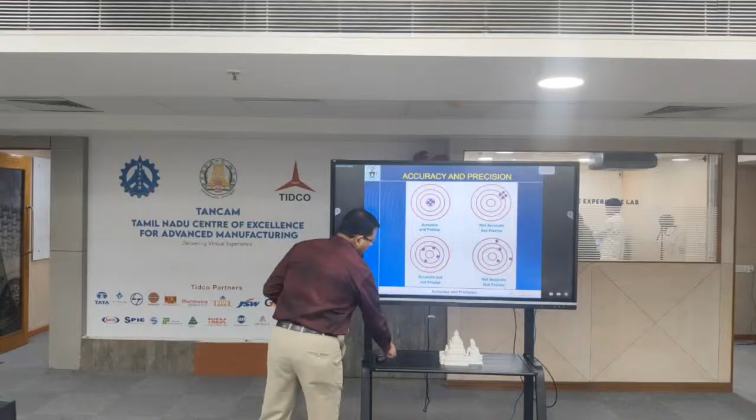You are doing so many drawings, maybe models. In the manufacturing industry, if you want to manufacture any component, we cannot manufacture it to the exact size. So we give tolerance on each part. Why are we giving tolerance? Because we are not able to manufacture the component to the exact size.

Because of so many things. Even if I say, for example, the height of this bottle is maybe 15 centimeters, how can you ensure this? I can say the height of this bottle is 15 centimeters. How can you ensure this? How can you test this?

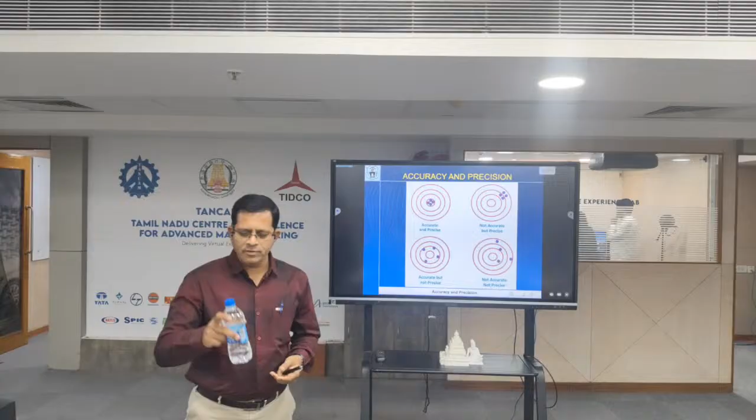Using measuring tools, you can use something, maybe a scale or tape. Because of this irregular shape, we have to measure indirectly, like measuring our height. We can mark on the wall, stand, and measure the height. Similarly, we can measure the height of this bottle also. But is it correct?

It may not be accurate. So while marking itself, we are doing some mistakes, or maybe there is error in whatever tape you are using, or there may be parallax error while taking the reading. There are so many reasons in measuring systems, measurement units, or measuring instruments. That's why normally we cannot manufacture any component to the exact size and shape. 100% accuracy is not possible.

So first we need to understand accuracy and precision in manufacturing. Of course we use this word very frequently, but both are not the same. So what is accuracy? This is accurate, but it is also precise.

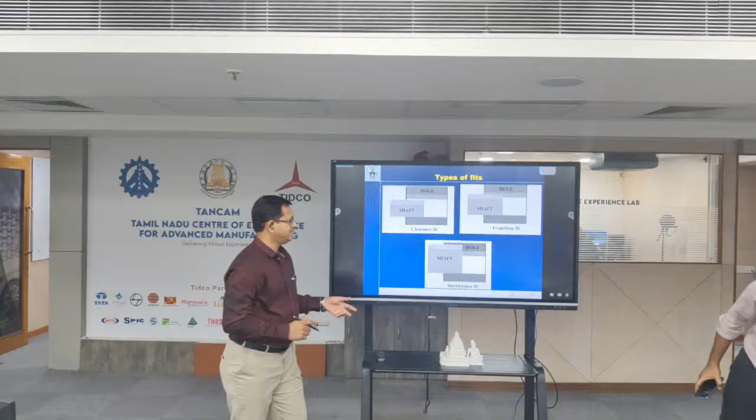Or I'll start here. So this is not accurate, not precise. As per this one, we want the target here, but the target is hitting at different places. So what is accuracy? If you are able to reach the goal with less error, then we can say it's accurate.

Then what is precision? Whatever number of times you are repeating, if you reach the same accuracy, then we can say it's precise. If you see, all four are different distances from the center, so these are not accurate because it is not inside the circle, and also all four are not at the same distance or same point.

So this is not accurate, not precise. But if you see this one, this is accurate because all four are at the same distance from the center, but it is not precise. Why? Because every time it is changing its place.

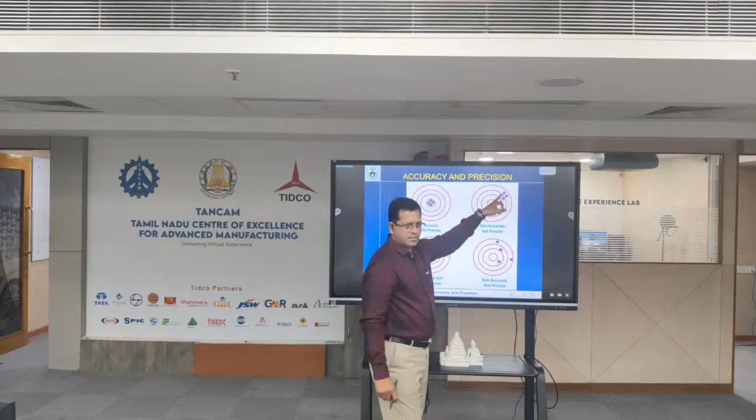Okay, and if you see this, it is precise, so whatever 4 times or 10 times you are doing, you are getting the target at the same point, but it is not accurate. And this one indicates both accuracy and precision.

For example, we are preparing for something, maybe a running race, or you are writing a test, maybe some JEE or some entrance test. There are two things: getting the maximum score is important, and at the same time, every time getting the maximum score is also important.

Suppose you are doing BTech or MTech. If you are scoring 90 marks in one subject and 40 marks in another, there is no use. If you are getting 90 marks in all subjects, this is very good, or at least all subjects around 70%, that is also good. But if you get 45 in one subject and 90 in another, you are not good in all subjects. That is what we understand.

So similarly here, we see accuracy and precision. In manufacturing, we want both accuracy and precision. That means suppose one time you are able to reach the goal within time, but the next time you are not reaching it within time, then there is no use.

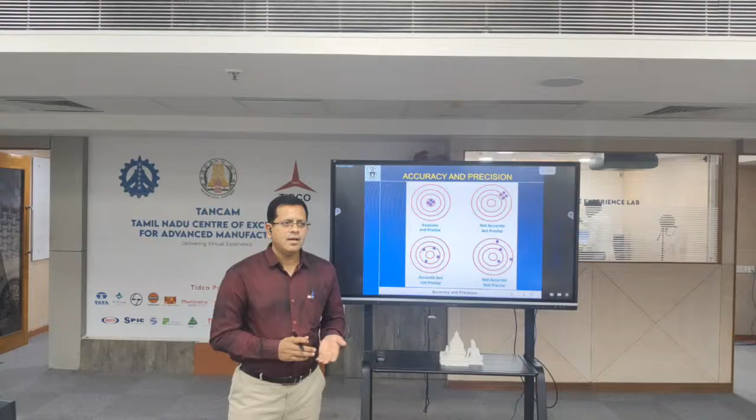So if you developed software or a machine, anything, every time over repetitive attempts you are able to achieve the minimum cost or maximum production or high quality product, then only we can say it is precise. So both accuracy and precision are important in manufacturing. Even if you are accurate, it is not sufficient, or if you are precise, it is not sufficient. Many times we use these two words simultaneously, but it should be very clear.

Right. So now we are coming to this. I think all of you know the tolerances. That's what we are discussing. So if you want to manufacture any component, normally we define a tolerance. That is, for example, if I want to manufacture a

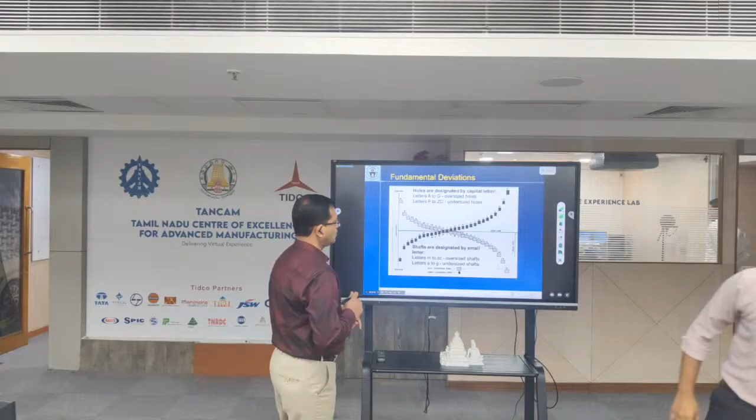So if you want to manufacture one shaft, right? So normally what we can do, we define the diameter is equal to maybe 20 mm, plus or minus. So we take the dimension as 20 plus or minus 0.1 mm, right? That means actually the basic size required is 20 mm, but we cannot manufacture exactly to the 20 mm. So we have to give some tolerance, right?

This is what we see in our daily life also. Your office is at 9:30, but are we exactly coming at 9:30? Some people may come 9:20 or 9:25, or some people may come 9:35. Even if everyone comes at 9:30, you cannot enter the door, right? That means we have to give tolerance on both the sides. Sometimes it is not possible. So, if you are giving tolerance on only one side, we can call it unilateral tolerance. Or if you are giving tolerance on both the sides, then we can call it bilateral tolerance. I think these are the basic things all of you know, right?

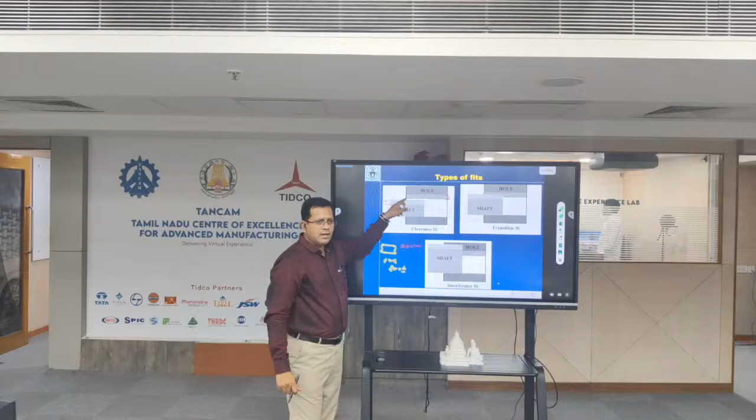So if you see, the lower limit of the hole is always greater than the higher limit of the shaft. That means if you manufacture a shaft, whatever the value, you are going to get a clearance. And similarly, if you see here, even the lower limit of the shaft is bigger than the higher limit of the hole. So always you are going to get interference. So in these two cases, no issue, right? Because this limit is always bigger than this limit, and here this limit is bigger than this limit.

But if you see this one, the transition fit, for example, if the actual dimension of the shaft is here and the actual dimension of the hole is here, then you are going to get clearance, right? But for example, if the actual dimension of the shaft is here and the actual dimension of the hole is here, then you are going to get an interference. That is why we call it transition fit. Okay. So in manufacturing, it depends on the functionality, the dimensions, or maybe our constraints.

Suppose you are given the limits like this in the transition fit. So you are manufacturing two components like this in the transition fit. Even though I am manufacturing like this, I want always a clearance. You got my point? Here, there is a possibility of clearance or interference. I am following these limits. But still, after manufacturing a lot of shafts and a lot of holes, in the assembly I want to always maintain a clearance. How can I get it?

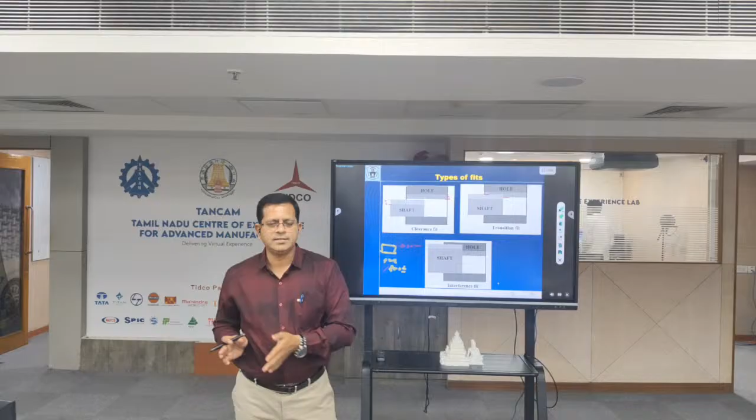Bilateral tolerance? Pardon? Unilateral tolerances. Using unilateral tolerance, I'm giving the dimensions like this only, right? But I'm not manufacturing a single shaft and a single hole. No one will. We are manufacturing shafts continuously and holes continuously. But while doing assembly, I want clearance. How can you get it? Machining? No, I am not going to do anything. I use only this.

Depending upon the assembly, we can choose the types of fit. Clearance fit for one type of assembly, transition fit for another type of assembly. For example, the pen and cap here. First, it's a hole basis method. Yes, this is called transition. Yeah, that is my question.

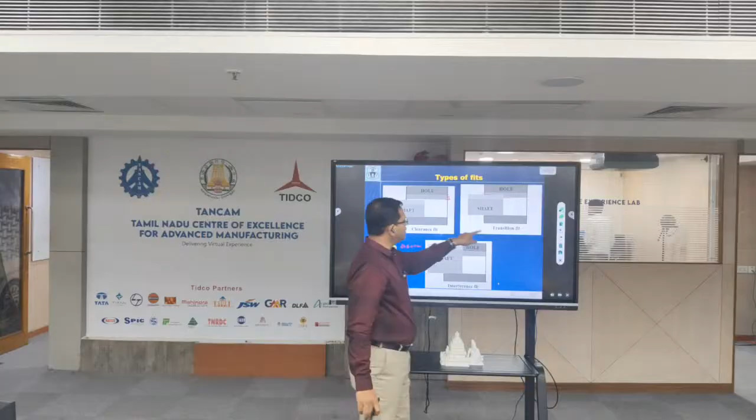Actually, we are following this system based on the component manufacturing, maybe material constraint or dimensional constraint or whatever. But we are manufacturing the shafts and holes individually. While assembling, it depends on the functionality. Sometimes I want clearance in one product, but in another product I want interference. How can I achieve that?

This is so simple. I'll give you a small example. For example, you have 100 people from one college and another 100 people from another college. All 100 people are cricket players, okay? But among them, a few are batsmen, a few are bowlers, a few are all-rounders or fielders. There will be a combination, right? The other side is also the same, okay?

So if I want a team which is very strong on the batting side, depending on the ground and the opposing team, we can change the mix of players, right? Sometimes we use a fifth bowler, sometimes a fifth batsman. Why? Because we know, depending on the ground condition, it may be a batting pitch, so we can use an extra batsman. Or on a bowling pitch, an extra bowler. Sometimes fast bowlers, sometimes slow bowlers.

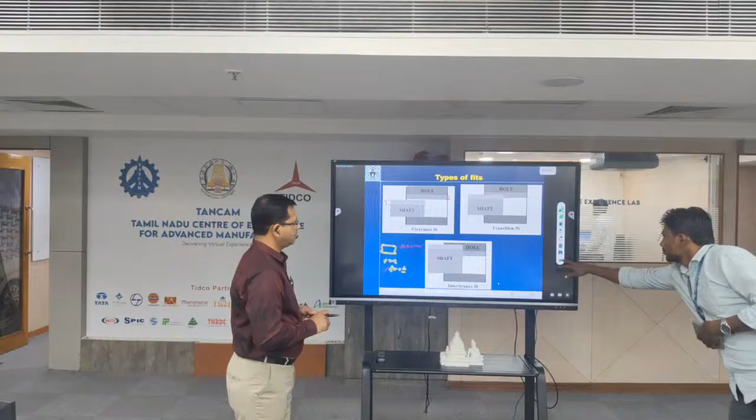So similarly, we use selective assembly. For example, you are manufacturing 100 shafts and 100 holes, and I want to mix these two to get 100 assemblies. Among these 100 shafts, take a shaft like this, and the tolerance zone is this one. We don't know how many are at the lower limit, how many are at the higher limit, and how many are at the exact dimension. Similarly for the hole also.

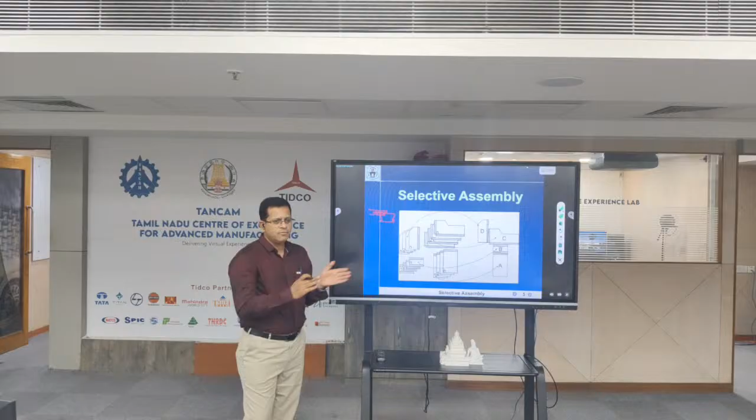Now I divide these 100 holes into 5 groups and the 100 shafts into 5 groups. Groups means nothing but dividing the same tolerance zone into 5 parts. Assume the total tolerance zone is like this. I divide it into 5 parts, and after measuring with a go gauge or no-go gauge, whatever components fall in this region become group 1, then group 2, group 3, group 4 and group 5. These are the shafts. Similarly, holes also I make into 5 groups.

Now I cannot assemble randomly. Actually, all these 100 holes and 100 shafts are within the limits. All are accurate and qualified for assembly. But still I am not randomly assembling. I make the holes into 5 groups, then take the shafts in group 1 and the holes in group 1, and assemble only group 1 to group 1.

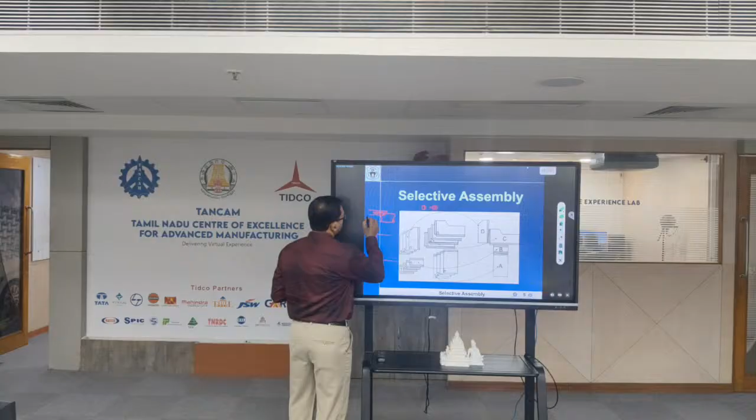Are you understanding? So for example, here you take the lower limit as 20.0 mm, and the higher limit is maybe 21.0. Then this may become 20.02, 20.04, 20.06, 20.08 and 21, like that, or 20.2, 20.4, 20.6, 20.8, 21, right? And similarly the hole dimension is also the same.

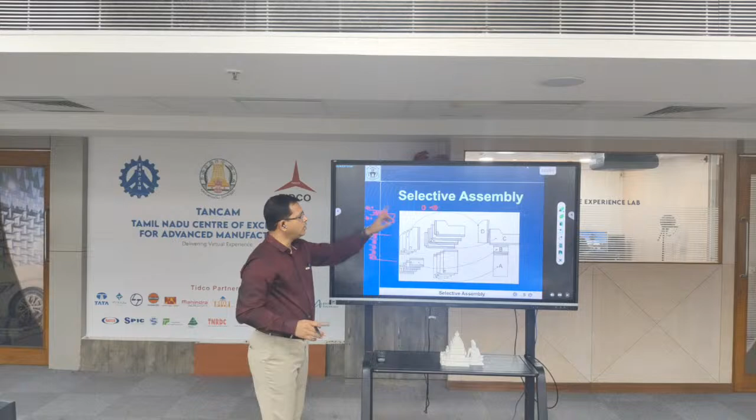So if I assemble the shafts in this group and the holes in that group with the same tolerance zone, we are able to get the assembly with very less clearance or less interference. So we are not changing the tolerance on the shaft or the tolerance on the hole. We are not increasing the cost, we are not changing the manufacturing process, we are not changing the material. The only thing is, before assembly, we are just making the groups, separating them, and assembling group 1 to 1. Okay.

So like this, this is one technique, grouping of the components based on their tolerance zones, so that we can increase the accuracy of the assembly or functionality of the component or product just by making groups in the tolerance zone. How many groups we make is up to you. It depends on the tolerance zone. Maybe you can make only 2 groups, or 3, 4 or 5 groups.

But one condition here is that the number of groups you make in the shafts and the number of groups you make in the holes should be the same. If this tolerance zone is divided into 4 or 5 parts, the same tolerance zone on the hole is also divided into 4 or 5 parts. So like that, without changing the manufacturing process, the material, or the assembly process, without changing anything, we are able to increase the accuracy just by making groups and assembling a particular group to a particular group.

So this is one of the concepts we can follow in precision manufacturing to improve the accuracy as well as the functionality of any product, right? Is it clear? Any doubts?

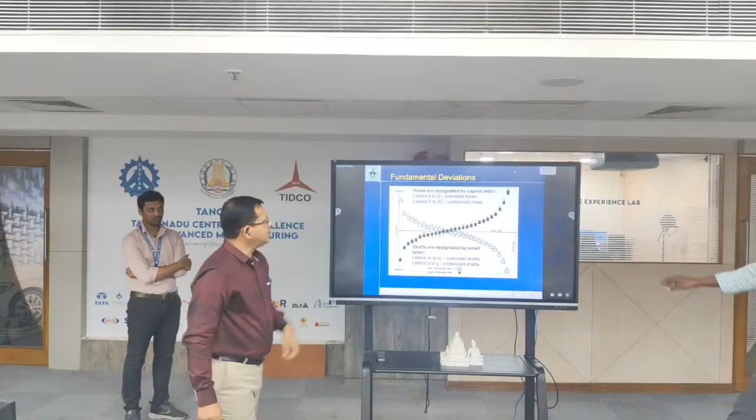Previous slide. Cancel. Previous slide. No, alright. So I think that's it.

I think all of you know this one. If you completed BTech, you should know, right? So these are the fundamental deviations we see on holes and shafts. Normally we use 18 grades of tolerances and 25 fundamental deviations, right? So this one is A to ZC. These are the fundamental deviations we indicate on the holes, and these are the fundamental deviations we indicate on the shafts. For example, we write like this, maybe 20.

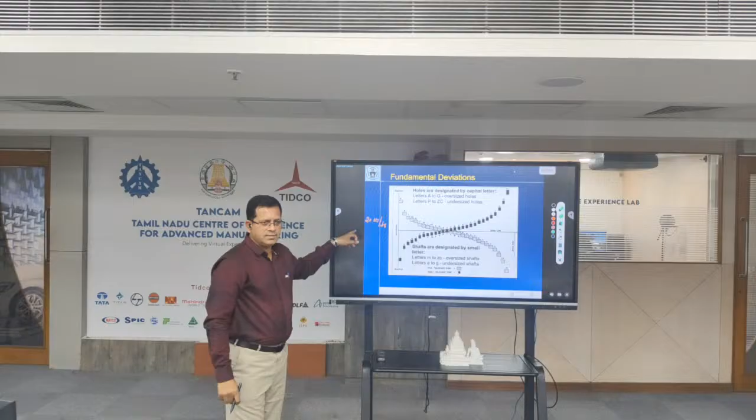So we can write 20 H7/f8. 20 indicates the basic size, and capital H indicates the fundamental deviation on the hole. H does not mean hole; any letter can be used, but a capital letter indicates the fundamental deviation on the hole, and a small letter indicates the fundamental deviation on the shaft. The number corresponding to the capital letter indicates the tolerance on the hole, and this one indicates the tolerance on the shaft, right? So H is 7.

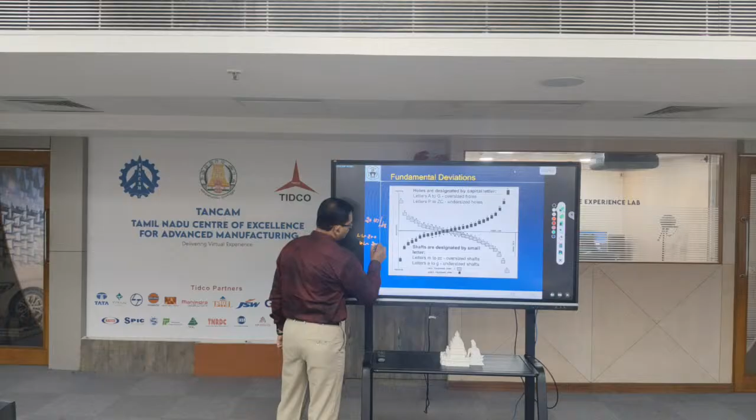So this is H, the fundamental deviation on the hole. And f is this one. The basic size is 20, and if you see here, the fundamental deviation coincides with the zero line. That means for this hole, the lower limit is 20.0, and the higher limit is 20.0 plus the tolerance corresponding to grade IT7. I think all of you know how to calculate the tolerance, right? So this is the lower limit and this is the higher limit for the hole.

Similarly for the shaft, the basic size is 20 and the tolerance is this one. So this becomes the higher limit of the shaft, and this becomes the lower limit of the shaft. The higher limit of the shaft is equal to the basic size 20 minus this gap, that is the fundamental deviation. And the lower limit is equal to that minus the tolerance. Okay.

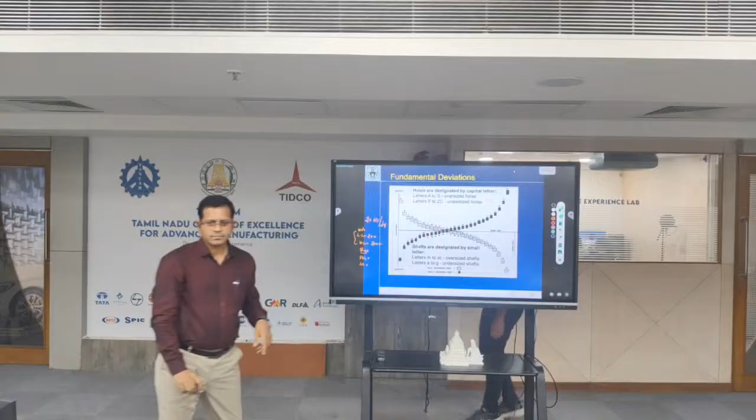So like this, normally in an assembly, if you know the basic size, the fundamental deviation and the tolerance, we calculate all the limits on the holes and the shafts, right? Okay. But here, one more thing is there.

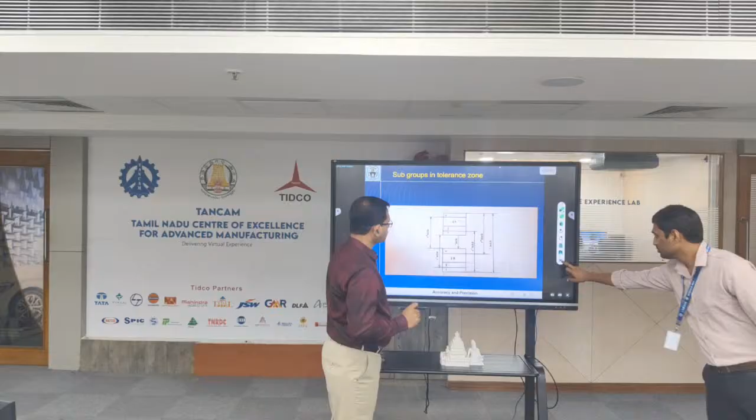So here one more thing is there. Again, in the transition fit, there is a possibility of either interference or clearance, right? For example, take this as the hole. The lower limit of the hole is this one, and the higher limit of the hole is this one. And the lower limit of the shaft is this one, and the higher limit of the shaft is this one. Now, if you take this size 40H7/m6, this is the diagram.

So this is 40.0, the lower limit of the hole, and this is 40 mm plus 25 micrometers. And this is the lower limit of the shaft, that is 40 plus 9 micrometers, and this is the higher limit. So after manufacturing, what is the actual size of the hole? We don't know. It may be here, or here, or here. And similarly, after manufacturing, the shaft will also be somewhere, right? We don't know.

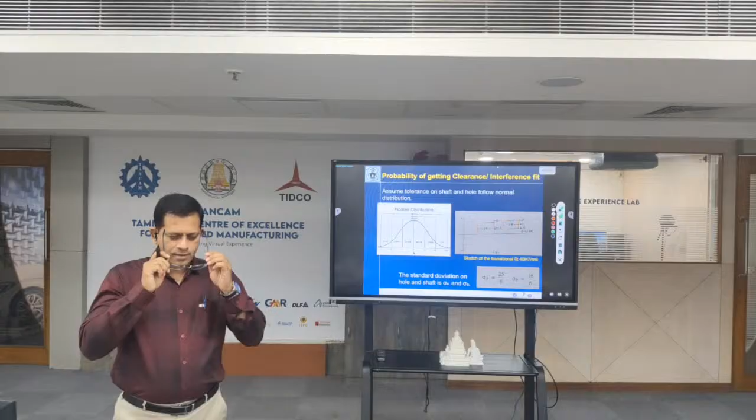So if you manufacture a hole and shaft like this, after assembly, what are you going to get, clearance or interference? How can you say? Making groups, forget about that one. Groups is another concept. To improve the accuracy, we can make groups, and within the group we make the assembly, depending on whatever clearance or interference you want.

Now we don't have groups. We manufactured only one hole and one shaft. Now I am assembling. So what is the probability of getting clearance or interference? How can you say? Because the definition of the transition fit is either clearance or interference. Then how can you say? 50-50? No?

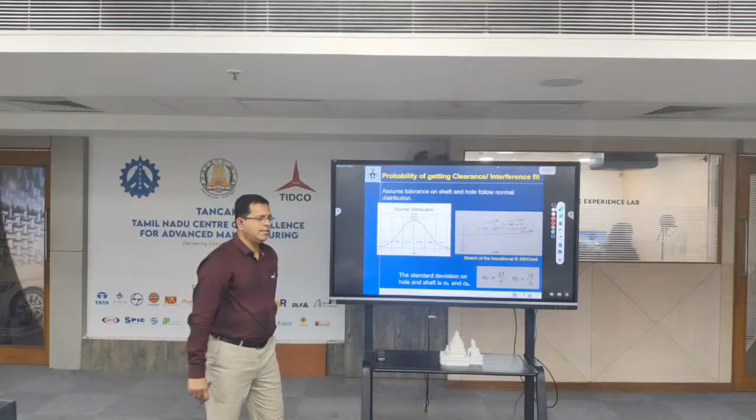So here we need to understand one more thing. Take this tolerance zone. This is the center line, the mean value, for this tolerance zone. And similarly, take the mean value of this tolerance zone. Now consider only mean values. The mean value of the hole is less than the mean value of the shaft, right? And manufacturing always follows the normal distribution curve.

That means if you manufacture 100 holes and 100 shafts, the actual sizes of the hole and shaft follow this normal distribution. If you find the standard deviation, some components are within this sigma range, others within this range, and very few components are within this range. So most of the components are near the mean value, at least 68.26%.

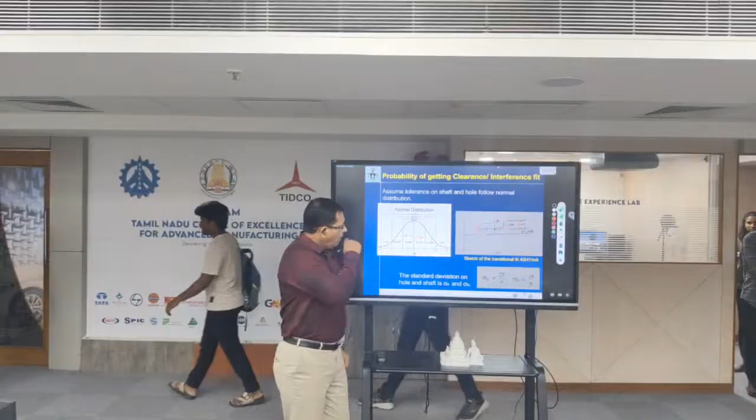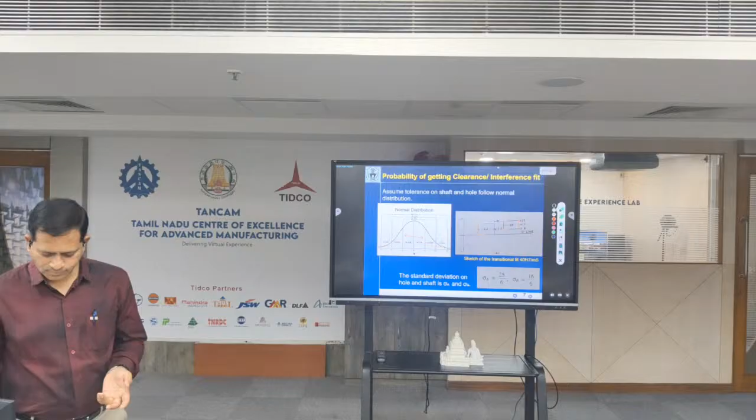So even though the basic size is 40.0, and we have lower and higher limits for both, you take the mean values and compare. From the mean values, we understand that the hole size is less than the shaft size. So the probability of getting interference is more, but how much more? Here the probability of getting interference is more than 50%.

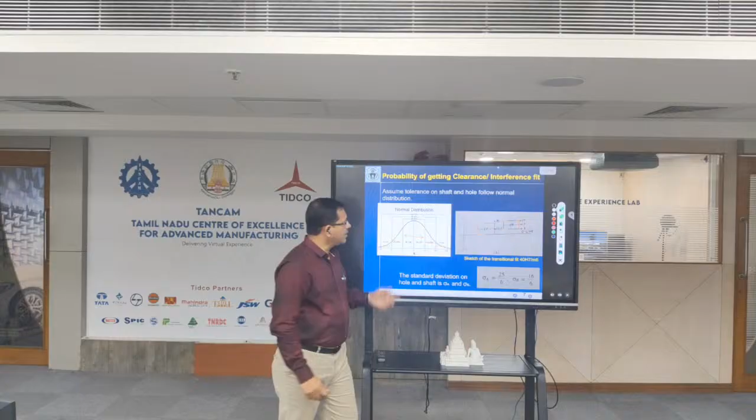For example, if the hole mean value is greater than the shaft mean value, then the probability of getting clearance is more than 50%. Is it clear? So from this we understand which one you get in most cases. And by calculating the standard deviation, 1 sigma, 2 sigma, 3 sigma, we can calculate this difference. This is 17 minus 12.5, that is 4.5. So calculate the equivalent standard deviation.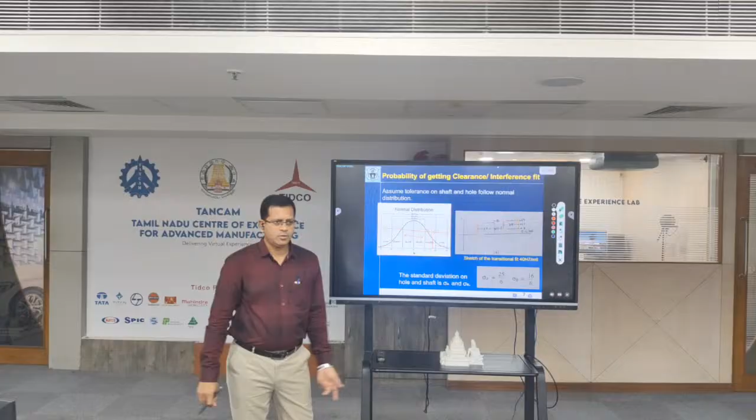Here interference is there, and it may come somewhere here based on the percentage of area covered under the 6 sigma limits. All this is interference and this is clearance. So the probability of getting interference here is around 74% or 77%, and clearance only 20% or 22%. I'm not going into the calculations, but like this we can find exactly the probability of getting clearance and interference.

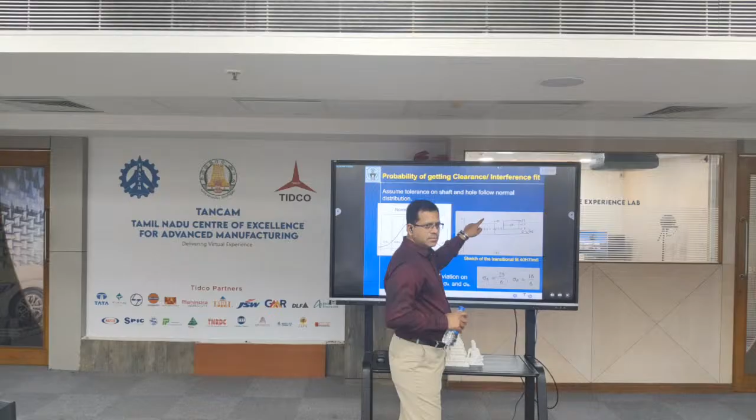I am not touching basic things like tolerance and fundamental deviation, because all of you know these. These are two important points we normally don't study at the BTech level: without changing the tolerance, manufacturing process and material condition, how to improve the accuracy; and for a transition fit, the probability of getting clearance or interference. If you want more clearance, keep this one below this one. Like that you select.

Like that you select these fundamental deviations. Okay. So these are the two important concepts we can follow to get more accuracy and precision in any of the manufacturing process. Of course, for these things we have exact calculation also. That is, how much exact percentage we can get, or how many groups we have to make, and by making the groups how much accuracy we are able to improve, etc. But I am not going into a deep dive. Just try to understand the concept, right?

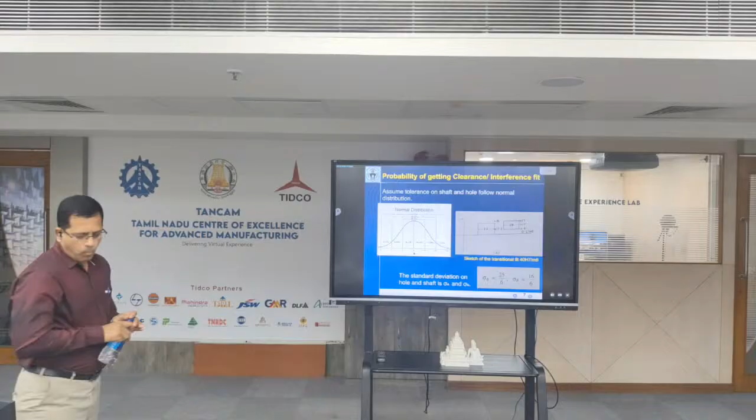Right. I think you heard this one, GD&T. Maybe at the BTech level, we don't discuss this one, right? That is what previously also we were talking about. For example, if you have the hole and the shaft. We take this is the shaft and this is the hole. Normally, we define diameter of the shaft, diameter of the hole, and also we give tolerance on the shaft and tolerance on the hole, right?

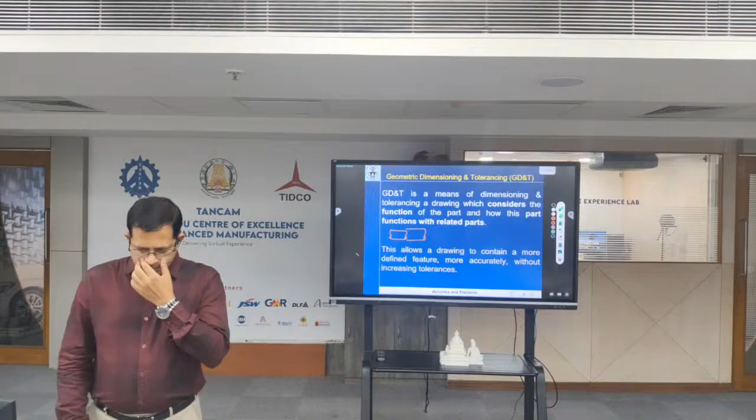But I think most of you observed we use racks in the table, right? Sometimes the rack will not go freely. Why? Due to moisture. Pardon? Even though you manufacture that rack, the outside one and the box, to the exact dimension, it will not go freely. Due to roughness. Okay, any other reason? Because of interference. Interference, no, already we are taking care of that with the type of fit. Because of surface finish.

See, this bottle is there. I am fixing the cap. Sometimes it will go freely, but sometimes it will not go freely. All of you experience this one. Why? What can you do then? Temperature. Fixing it properly. Properly means? Positions.

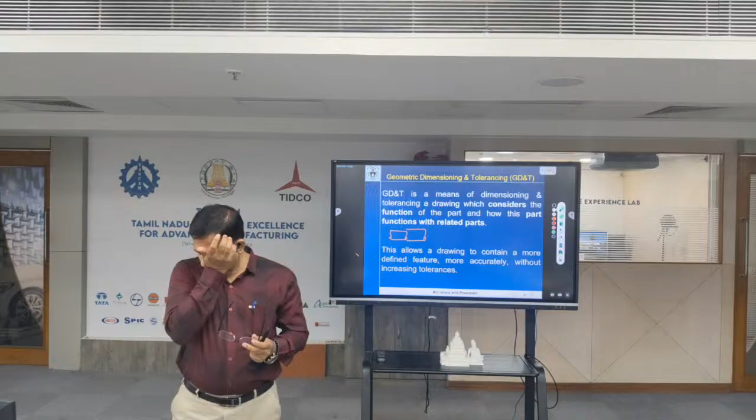We use this so many times. Maybe this type of thing you want to fix into the system. Sometimes it will not go properly. Then you remove and again keep. Why? The same component, but one time you are not able to keep it properly, and one time you keep it properly. Because if it is going into the hole exactly in the same line, then it will go freely. But if you are keeping it like this and trying to move, it will not go. The rack also is the same. There is an angle inside. If the rack is moving exactly parallel to the hole, it will go into the hole. But if it is moving at a different angle, it will not. Am I right? Yes.

So here in the dimensional tolerances, we are talking about only the diameter and the tolerance on the dimension. But even though this is within the same limits of the dimension, if you take the axis of this one and the axis of this one, the two axes are not matching properly, right? Suppose we have a component like this with a hole, and I want to keep a shaft into it. If I keep the shaft like this, the axis of the hole and the axis of the shaft are not matching, then it will not fit. Am I right? Yes.

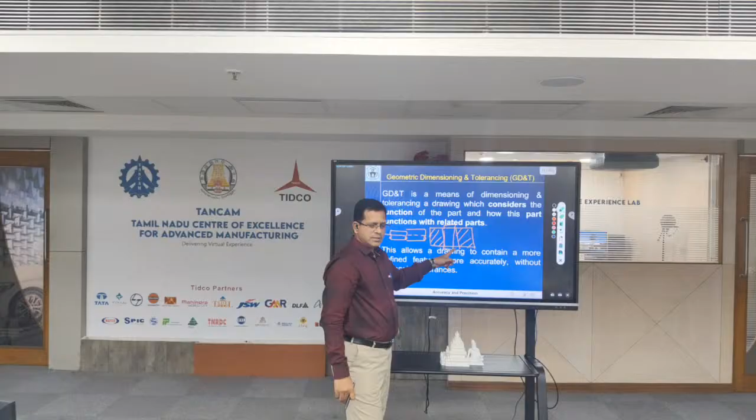So how can you ensure whether the shaft is exactly going or not? Because already the diameter of the hole and the dimensional tolerances are selected, and this component also is given dimension and tolerance. So while manufacturing separately, both qualify for quality, but while going for assembly, there is a problem. That is where the concept of geometric dimensioning and tolerancing came into the picture. That means sometimes only the dimension is not sufficient. Along with the dimension, other features, that is geometry, are also important, right?

Geometric dimensioning and tolerancing means a dimensioning and tolerancing of a drawing which considers the function of the part and how this part functions with related parts. For example, if you are manufacturing this bottle and this cap separately, both may be correct individually, but if the axis is not exactly matching, you cannot fit them together.

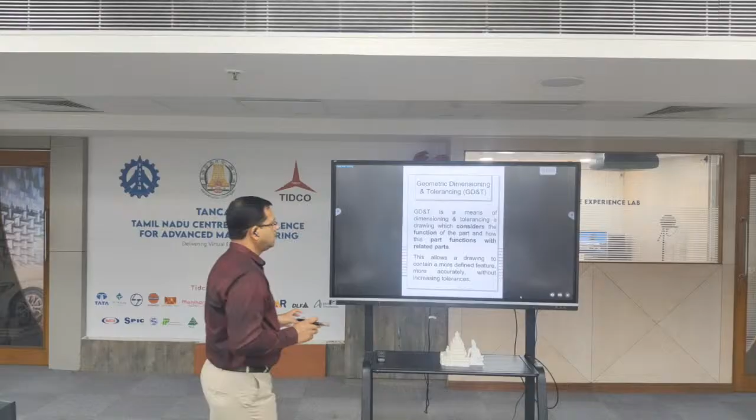You can see one example. We are making a table with 4 legs. I want the height of each leg to be 27 centimeters, for example. Definitely we should give a tolerance because we cannot manufacture exactly. So the tolerance given is plus or minus 1 centimeter. While manufacturing all 4 legs separately, if the dimension is 26, 27, or 28 centimeters, I have to accept it.

Because that is within the limits of the dimension. But after making all 4 legs and the top surface, during assembly, if the legs have different dimensions like 26, 27, 28, 26, then what will happen? The top surface is not flat. That's what you feel sometimes in your house, the floor is not flat, or when purchasing furniture like a table or rack, it will be slightly moving, so we keep some papers underneath. Same reason - all legs are not having the same length, or the floor is not flat. Either reason gives tilting in the component.

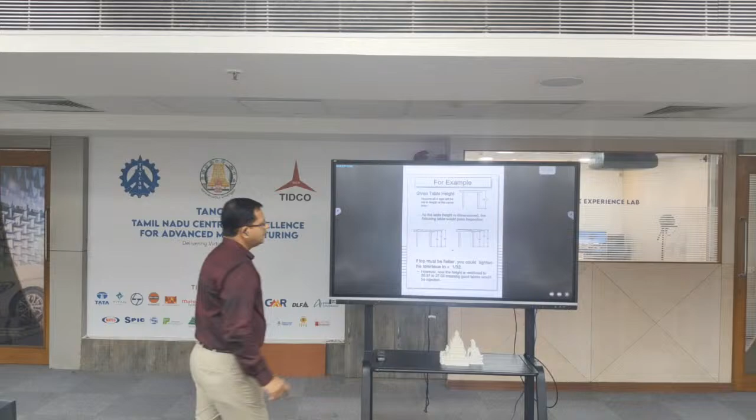So if you define another condition here, like this surface should have deviation of only so much - along with the height, I also define the deviation allowed on the flatness of the top surface as 0.06 mm, or whatever unit you follow. Then, even though we are manufacturing the legs with the same dimension, I cannot select the legs randomly. I can select legs which are nearer to the same height, and ensure the flatness of the top surface.

Are you understanding? So you are keeping another constraint or condition to ensure the quality of the product. That is what we actually do in GD&T. If only dimensions are given, that's normal dimensional tolerance with no geometry involved. But here the flatness criteria is also involved, which is why we call it geometric dimensioning and tolerancing.

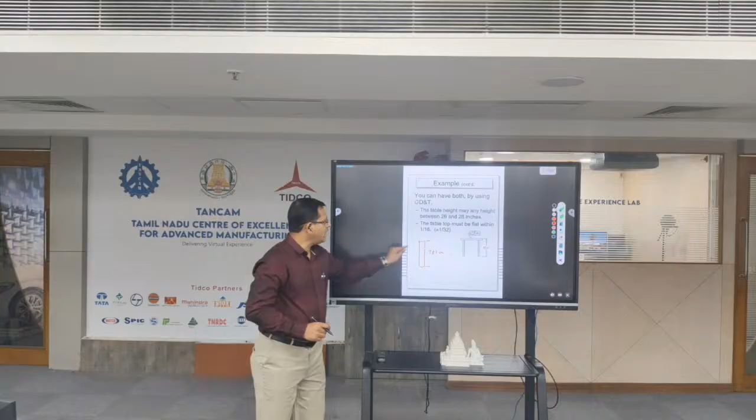Why are we defining 7 centimeters? This is a single component - what is the functionality? Writing on the blackboard smoothly and properly, it should be comfortable to the writer. The functionality depends mostly on the quality of the powder we are using, and also the quality of the blackboard, but not on the length. Here length is for our convenience - if it's too long I cannot hold it properly, if too short also I cannot hold it properly, so length is important but it's a secondary functionality.

So even if I give the tolerance plus or minus 1 centimeter, it doesn't affect the overall functionality of the component. But if I take this pen and this refill, the length of the refill is also approximately 7 centimeters. Can I give tolerance like 7 plus or minus 1 centimeter to this one? No, it's not possible. Maybe I can give 7 plus or minus 0.01 centimeter, or maybe 0.05 centimeter. That means the deviation allowed on manufacturing this length is very less, while the deviation allowed for manufacturing the chalk piece is very high.

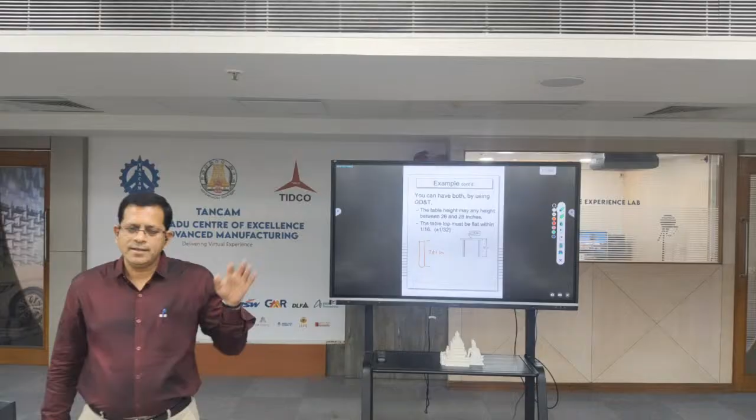Just this is an example I am saying. This value we can decide depends on the application again, and depends on the material what we are using, and depends on the manufacturing process, etc. But here the importance is not on the numerical value. The importance is defining the flatness of the table.

Are you understanding? So along with this dimensional tolerance, we are defining geometrical tolerance also. That is called GD&T. With this one, we can improve the functionality of the components, as well as the accuracy of the components, etc.

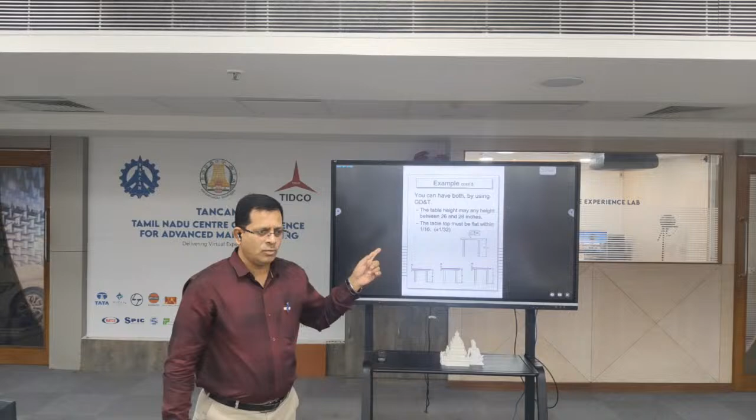So if you define like this, then the top surface of this one should be within that deviation. So for that reason, either you have to select all the legs at 26 or 27 or 28. This is what already I told you in the grouping of the component. To achieve this one, we require grouping.

That is just a length. That's why normally we are using the higher limit or lower limit, such type of condition. But all the components are not simple length and diameter or height. There are complex shapes also there.

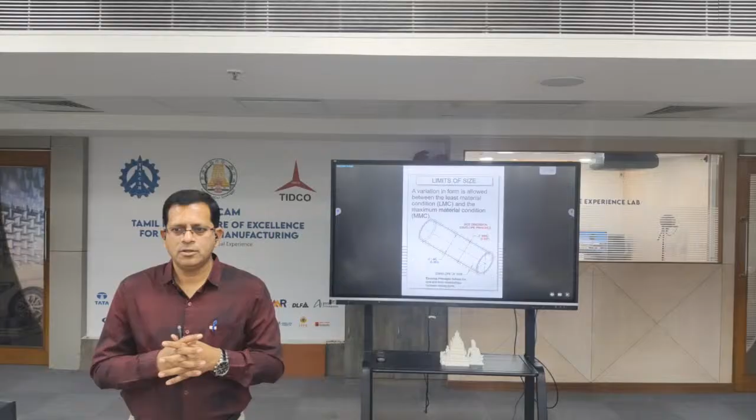So what we can do here is define the lower dimension, that is lower limit of the diameter, higher limit of the diameter, as well as define the cylindricity error also. That means even though the diameter is varying, the total surface should be within that envelope. Then only we can achieve the functionality of this component. Like this, if you have any different shapes, you need to understand that.

So you see, the same cylinder you have to keep inside this box or some rectangular or cubical part. We have a hole, and this is inserting. That is what I already told you. Maybe if you are not following GD&T, if you measure the diameter of the hole at this end or that end, it is satisfied. Similarly, if you check the diameter of this cylinder at different points with the vernier calipers or micrometer, it is also satisfying, the dimension is between the lower limit and the higher limit.

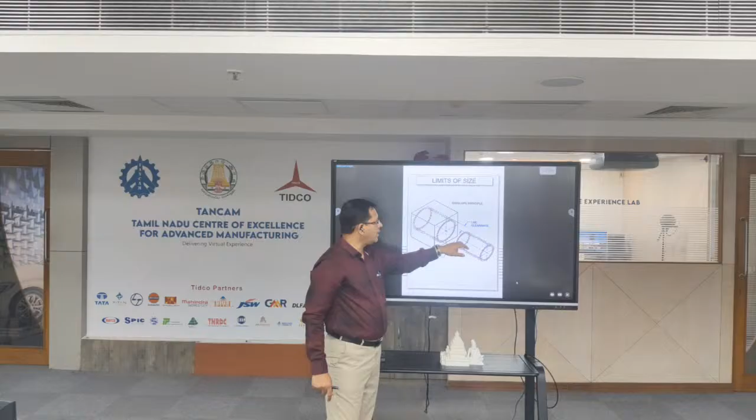But however, sometimes you may not fix this one into this. Why? Because the axis of this one may not coincide with the axis of this. And here somewhere it is at lower limit, at the same point this may be at higher limit. So that is why we have to define the cylindricity error also on this one, as well as define the axis of this cylinder and the axis of this hole should be parallel.

Like that, depends on the shape, size, and functionality, the more number of constraints or definitions we can add to avoid the inaccuracies and to increase the accuracy and precision of the component. So this is the need or necessity of the GD&T.

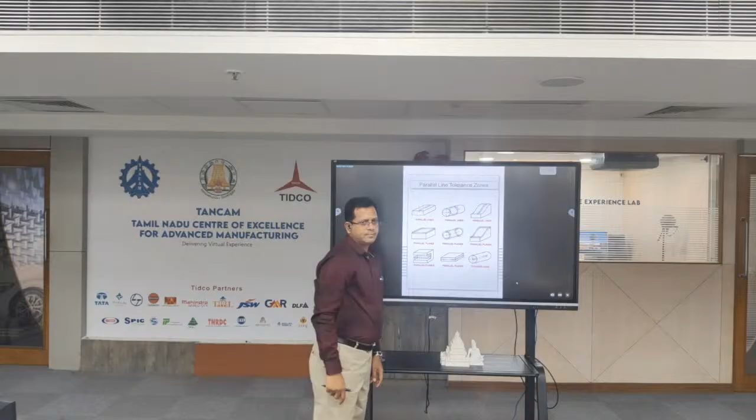And similarly, sometimes the planes are like this also - parallel planes, and here also parallel planes. This is the cylindrical zone, right? So the center of the cylinder should be within that zone.

I'll show you. In total GD&T, there are classifications. So the type of tolerance is called one type. The first type is form tolerance. Under form tolerance, we have flatness, straightness, circularity, and cylindricity.

Like whatever we saw in the example table, right? Along with the height, we have to define the flatness. And similarly, we have to define sometimes the straightness, sometimes the cylindricity, and sometimes the circularity. So these are called form tolerances, because these are the individual features.

Individual features. But these individual features sometimes may be related features. These are called profile features - that is line profile or surface profile. So flatness and profile, these are also individual profiles, but sometimes this is linked with some other feature, right? For example, we can say it is the same thing.

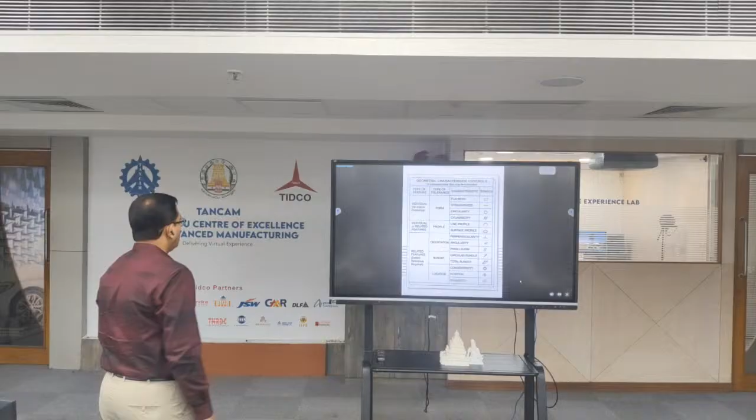Suppose I want this roof to be horizontal. How can you say it is horizontal? Measuring instrument - see, I want this one flat, especially also flat. Suppose you take any book or mouse pad or something like this, then this is a flat surface. So if it's like this, also flat; like this, also flat; like this, also flat, right?

Are you clear? But at the same time, now I want this surface should be flat with respect to floor - parallel. So this surface should be parallel to the ground. Similarly, this ceiling should be parallel to the floor, perpendicular to one. So flatness is also required, but with respect to this one. So like that, if we want this pillar should be perpendicular to the floor...

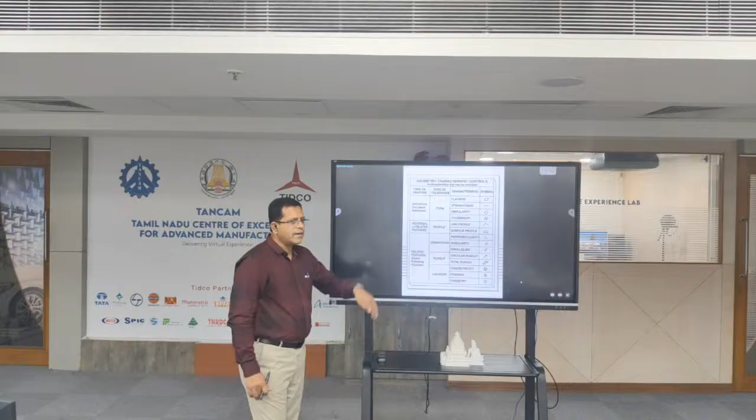So profile, line of the profile, sir - how to link the individual or related? This is the profile, one line only, right? So suppose the surface is okay, suppose you relate it to other surfaces. So line of the profile, how to check it? That is what I told you. For example...

This one, I want cylindrical. So cylindrical means you can check circularity and further length, right? But at the same time, we can use some other one where we are keeping another cylinder into that. This is the outer shell, but inside we have some concrete cylinder. Then with respect to this inside concrete pillar, this outer shell should have the same profile. Got my point? See, I'll give you another example.

Suppose you take this cover - take this cover. This is normally flat. We can define this, forget about these edges, all these things - this is flat, right? So individually, if you see, this is a flat component. But when you want to assemble with this one, this surface should exactly match with the surface of the phone. Right, this is a flat one, but like this, some curve is there. So this curve, with respect to the phone curve, should match. That is why this profile, maybe you can define separately, or sometimes depending on the application, with respect to something else also.

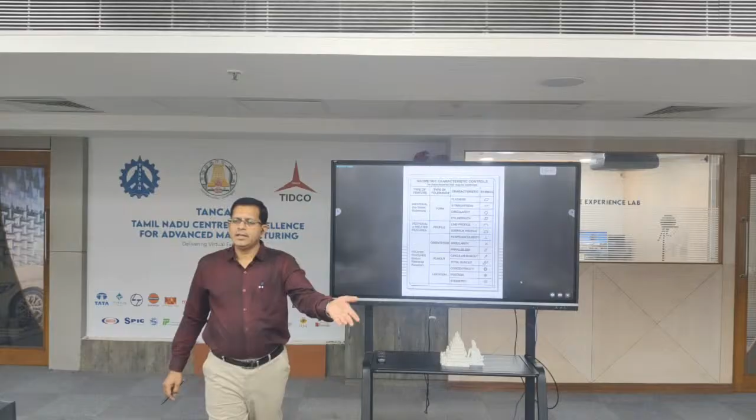Got my point? But if you see these features, wherever you define, you cannot define with respect to other one. It is individual. But these two, sometimes individual, sometimes depend on the other things. That is why these we can call either individual or related features. But all these are definitely related features. Without some reference, we cannot define this. That reference we can call a datum, right?

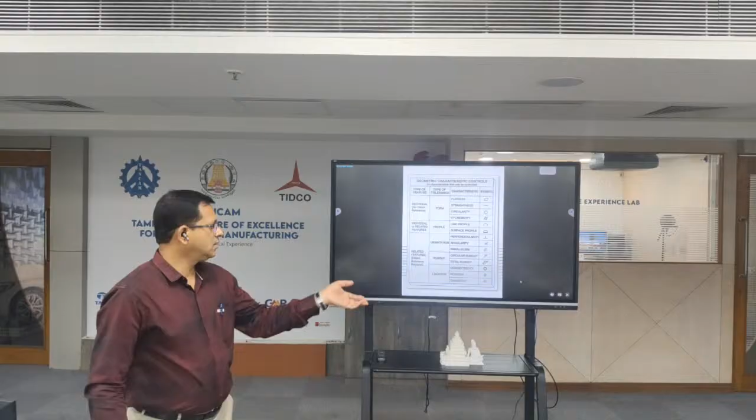If you remember the first example, on the table, we are given only the symbol and value because those are individual features. That is why these three are not there on that feature control frame. We are only giving the geometry, flatness, and the value allowed. But if you are using related features, then we have to use these boxes also, where we can define the primary datum, secondary datum, tertiary datum, like that.

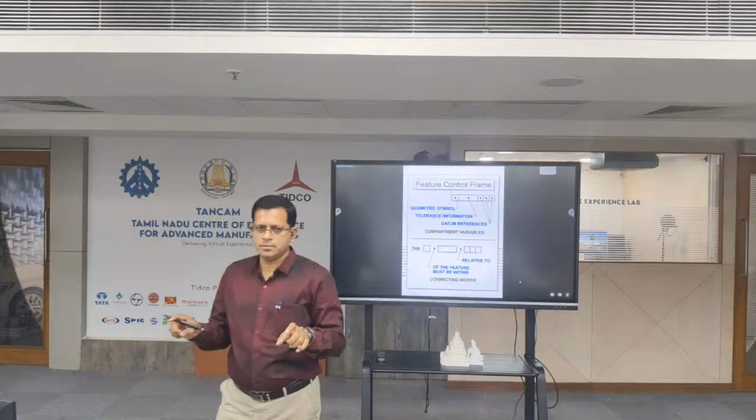Okay. So like this, we can define. This is one example. This indicates the geometric symbol, that is position, right? And this indicates the numerical value. This indicates that the numerical tolerance is at maximum material condition, and with respect to primary datum, secondary datum, and tertiary datum. That means here we are defining all three datums. Sometimes we require only one datum. Sometimes we require two datums.

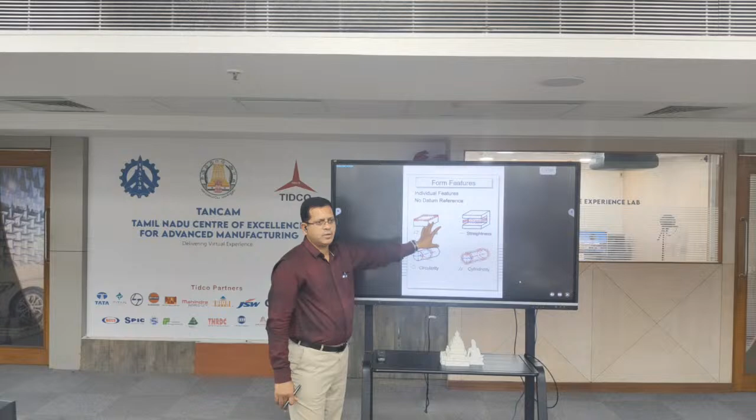So the individual features without datum are flatness, straightness, circularity, and cylindricity. The same thing that is in the table, I am just showing in the diagrams. Okay. Then next, these features require datum features: perpendicularity, angularity, parallelism, circular runout or total runout or radial runout, and position, concentricity, and symmetry.

So normally here position means, for example, take any component where we want a hole at the center or somewhere else. Then how can you decide the position of the hole? We say position, right? We use this word regularly. Suppose you want to keep your sofa in your house, you can select a position, right? But are you keeping it exactly at the required position? Or if you are making a hole, is the center of the hole exactly matching your dimension? May or may not, right? That is why we follow this. We define this position and then concentricity and symmetry.

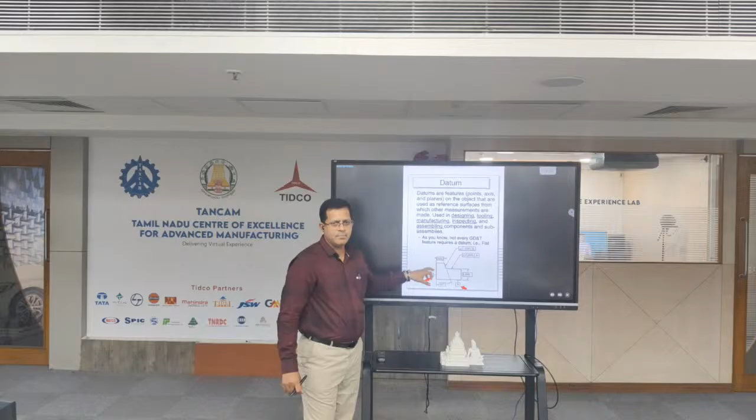So we can use different datums with letters A, B, C, etc. Next. Right. You can see this. So this is datum A, right? So, for example, you are keeping this table, and I want the table flat. Okay. So here I need one datum, that is the floor. That is sufficient because I want the table to be flat.

Okay. But at the same time, I want to keep this table flat and also perpendicular to some other wall. Then I can use the secondary datum, or sometimes we use that corner, right? So that one should be perpendicular to this wall, whereas parallel to the bottom. Then we use three datums.

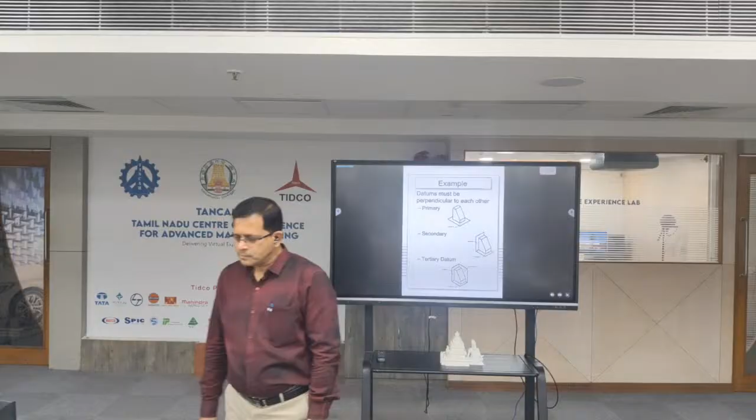So normally, I think you all studied the 3-2-1 principle in jigs and fixtures design. So once you are fixing one datum, normally 3 degrees of freedom will be arrested, right? Then you fix another datum, then 2 degrees of freedom will be arrested. Like that, whichever surface gives more visibility to your component, that one we select as datum A. So this may not always be datum A.

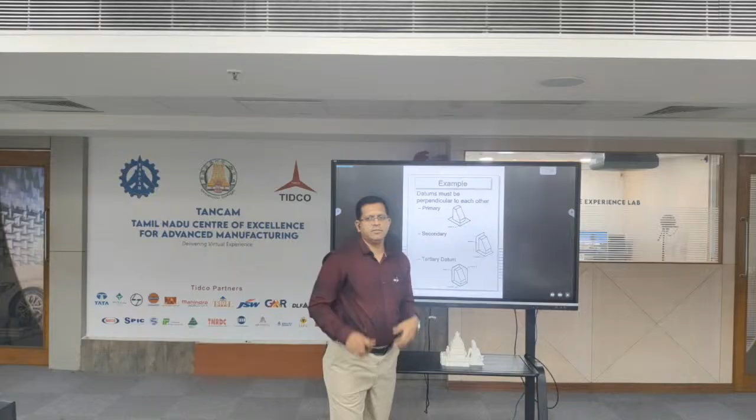Sometimes this may be datum A; it depends on your component, your manufacturing process, the size and shape of the component, or the machining process we are using. See, for example, you are making a rectangular component, then the datum may be the bottom surface. But take maybe chess coins. These have so many curves and are symmetrical. So in that case, the datum may be different. The axis may be another datum, like that.

Okay. So it depends on the component. You have to check which plane can give or define more features on the component. That is the primary datum. And if one datum is sufficient for us, we stop with the primary datum. Suppose you are not able to define all the features with one datum, then you have to search for a secondary datum. If required, then you have to go for the tertiary datum, right? Next one.

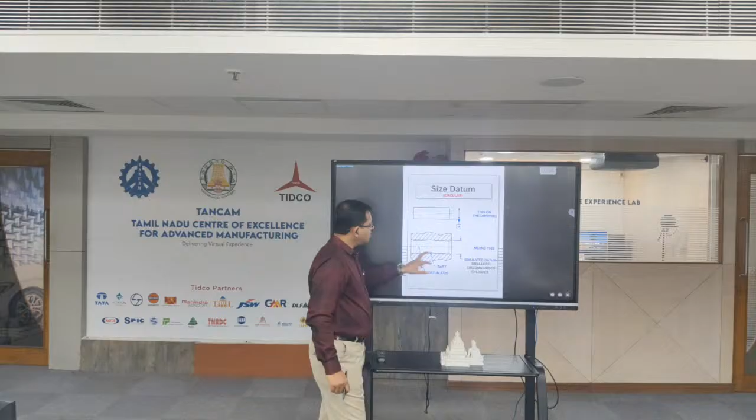So this is called a size datum. That means the datum may not always be a plain flat surface. Sometimes the datum may be a circular surface also. The inside surface of a hole may be a datum, or sometimes the outside surface of a shaft may be a datum, or sometimes some other plane. In this case, the cylindrical component is going into this one. So now this surface of the hole is the datum. With respect to that datum, the axis of the shaft should be parallel,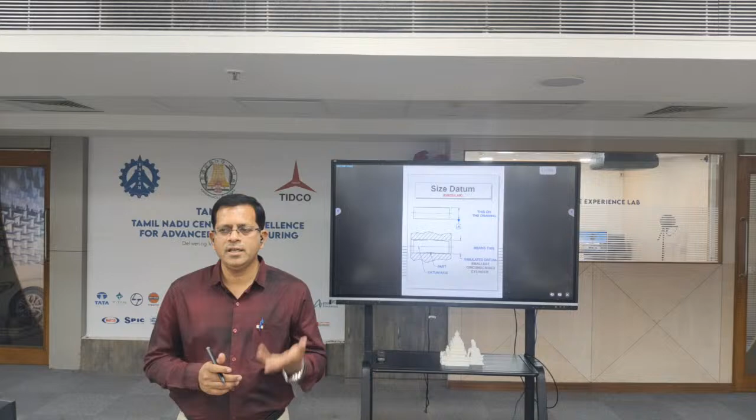like that. Okay. So like this, we can define datums, and we can use GD&T to get more accuracy and functionality, exactly whatever we require. Sometimes, without knowing, in the software we use dimensions, these symbols, surface roughness symbols, etc. But if you understand this, then it is very easy to use, and you can make better assemblies. Okay. Go back to original.

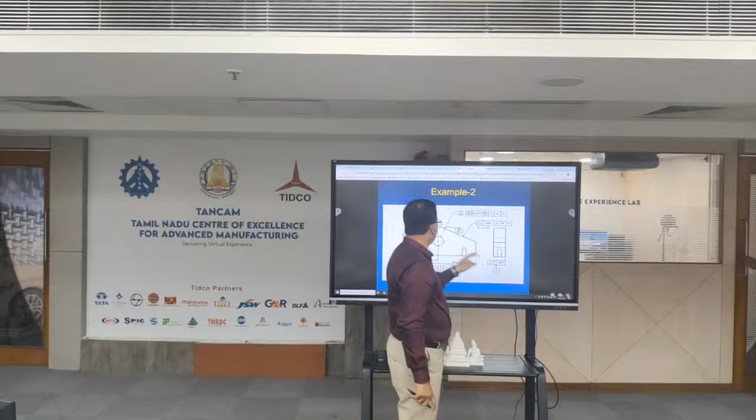So the bottom surface we can keep on the table or something. So this may be one datum, and this surface should be parallel to this surface, and this surface should be parallel to this surface, and the hole should be perpendicular to this surface, and again this slot should maybe be perpendicular to this one. That means this line should be perpendicular to the bottom surface. Like that, there are so many conditions.

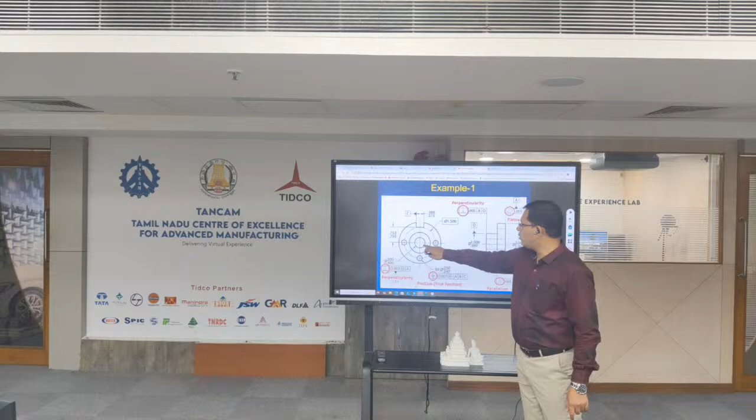So we can show it like this. This is datum A, right? Where we are defining this one, and the hole, right? And we can define a number of datums, that is the perpendicularity and position of this hole and these holes, and position of the slot, and this should be perpendicular to something else. Like that, we define each and everything so that we try to eliminate errors in the manufacturing process.

Suppose you are not saying this surface should be parallel to this surface, then what will happen? Maybe the dimensions are within the limits. If you measure this dimension separately, correct. Separately, you measure this dimension, correct. But this surface may not be parallel.

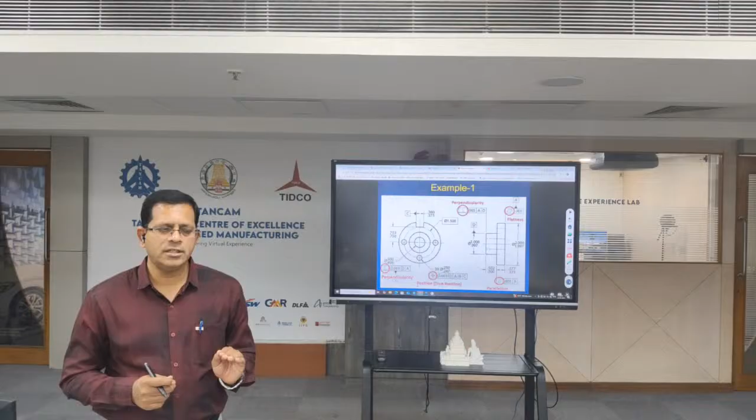Okay. In that case, what will happen? If you are keeping some shaft into this hole, that will not match, right? Or if you are fixing some bolts or some other part, then it will not match, right? So in that way, actually GD&T will improve the quality of manufacturing and the functionality of the products, etc.

These are all just small examples or basics, but there are so many things in GD&T. You have to learn to improve maybe your simulation or drawings, etc. Whatever. If you want to do it without any errors, you should understand these things. Okay. So I think I took a lot of time. I can complete with this one. So if you have any doubts, please ask me.

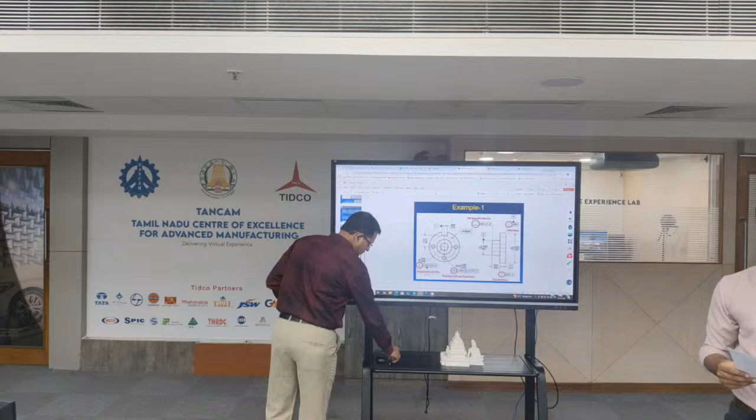Thank you, sir, for your insightful lecture. Thanks to all the audience for your patience listening. It was almost 1.5 hours, and you are with the same enthusiasm we started with. And I would like to thank sir also for his patience; despite his health condition, he has given a big lecture for all of us. Today's GD&T is very much useful. Those who are preparing for interviews, please take it. Those preparing for the GATE exam, this content is very much useful.

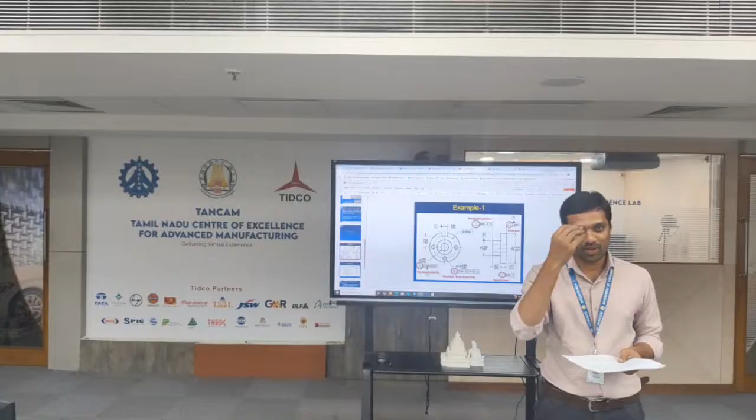But because of my repeated requests... In our recent data collection, we identified that almost 49% of our staff are graduates, another 35% are PG holders, and 14% are PhD holders. Don't calculate these to add up to 100, because I am giving approximate values. So what I thought is arranging these kinds of sessions will definitely help you achieve good ranks in the GATE examination. Some of you are appearing for GATE, and it will be an enlightening session. Particularly in GD&T, we don't have regular curriculum courses, if I am not wrong. So only people in industry are more into GD&T.

Sir has got 19 years of experience in the same subject. I wish you can interact with him for another couple of minutes, and he will definitely answer you. You can ask about this session, or if, for example, you want to register for a PhD or other future aspects, you can interact with him and learn some good things from him. Another 5 minutes is possible for us. Then we will go to a quick felicitation of sir, then a vote of thanks, and then we will disperse. So now the session is open to you. I request at least 4 or 5 questions from our enthusiastic audience. Please go ahead, you can come here and share your feedback.

All our spoke center people are watching. They will also see, and next time they will also participate. And it will be an encouragement for us to arrange these kinds of sessions. Maybe next time we will plan for CFD or some other simulation topic. One we have seen in design, one we will see in simulation, one we will see in digital manufacturing. We will try. I don't say it is 100% possible, but I will try my best along with my team. So now the session is open for you. I don't want to take much of your time. I want 1 or 2 to come forward and share your views, and you can ask sir anything sitting there also. Please.

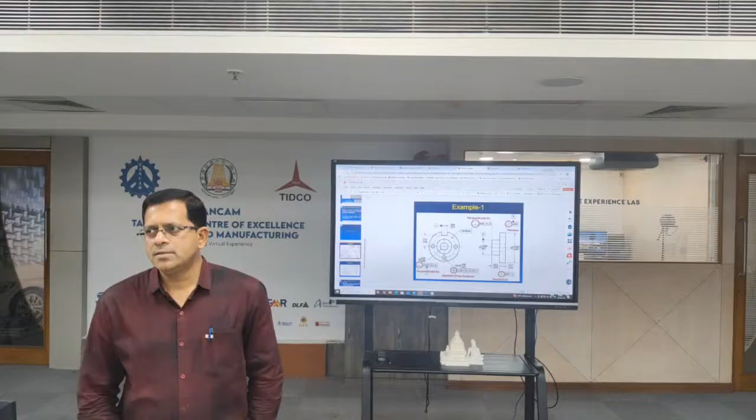you're talking about profile, right? Yeah, profile of surface. The profile of the surface they are indicating means that profile is very important for functionality. And again, that profile may be an individual feature or a related feature. In the drawing you can see an individual component, but when it comes to functionality, it is going to the assembly. This profile may be matching with some other profile, so both profiles should have the same thing. For example, I'll show you.

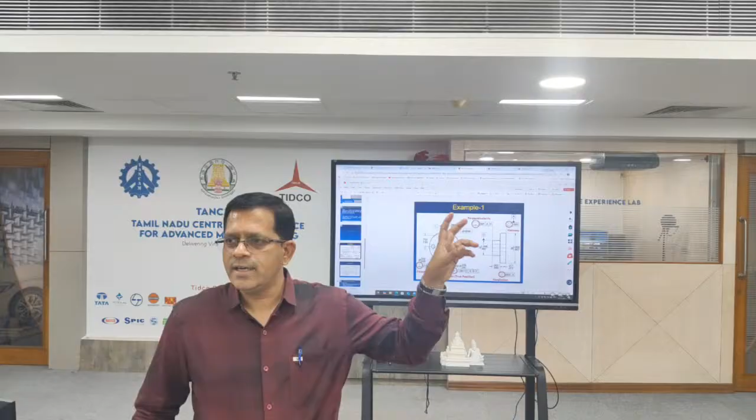Any piece of drawing should be done. Sometimes we can have different components, right? I'll show you. Have you seen ACs? Inside ACs we have filters. Yes. We have to often clean the filters. So do you observe the profile, I mean the shape of the filter? It is like this. Yes. Right. If you open it, it may be slightly bending, right? But when it goes inside, it is like this.

So for this filter to go inside, at the edges you have slots. So the profile of the slot is a curve, right? And this filter edge, also plastic or fiber, should have the same profile. Then only this filter goes in smoothly, right? So in that case, this is not an individual feature. This is a related feature.

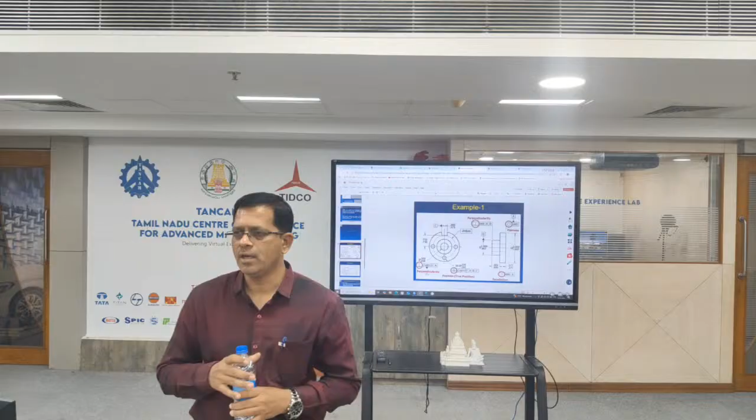Are you clear? Yeah. But sometimes, I have seen in one of the forging drawings, they have mentioned that the forging surface needs a profile of surface about some other. They have mentioned it on that drawing. That is what I'm saying. The component drawing may be given, but if you understand the functionality of that component, if it is going to the assembly, then only we can understand whether it is an individual feature or related feature. For example, take this curvature.

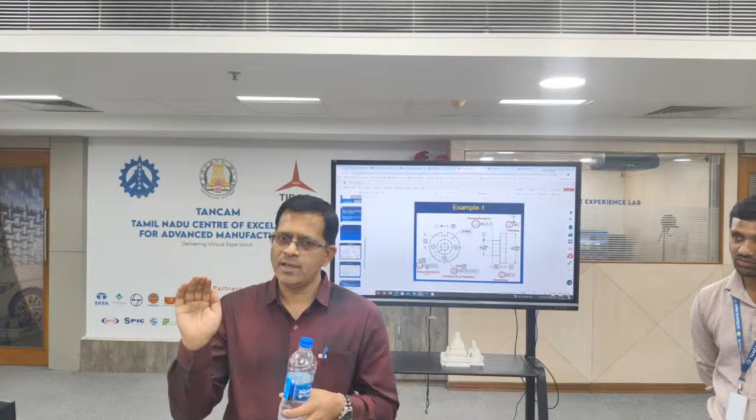This is an individual feature. This is just for holding purpose. So even though this profile is slightly deviated, it doesn't much affect it. But as I told you, if the AC filter profile or the slot curve is deviating, the filter will not go smoothly. You have to apply pressure. Sometimes it will break. So these are the things we can observe in so many places.

Maybe if you take your remote, on the backside where you change the batteries, there is a cap. Right? It's simple. Take this one. Here we can keep it like this and press it. So this pin's profile should match exactly with this hole. Otherwise, when you are keeping it like this, you have to apply more pressure or less pressure, or maybe after a few uses, it will break. You got my point? Yeah.

So when it goes to the assembly, it is linked with the other surface. If it is not like that, just a bottle, we require circularity, but it is an individual feature. Is it clear? Yeah. So any other?

Sir, I had one doubt. In mass production, is it possible to produce multiple components of the same size using CNC or VMC or advanced manufacturing processes, rather than traditional manufacturing? See, compared to conventional machining, in CNC you get more accuracy, but not 100%. Why? Because in conventional machining the operator is checking the dimension or changing the speeds, so slight variation is there. In CNC you may get more accuracy, but still it is not 100%.